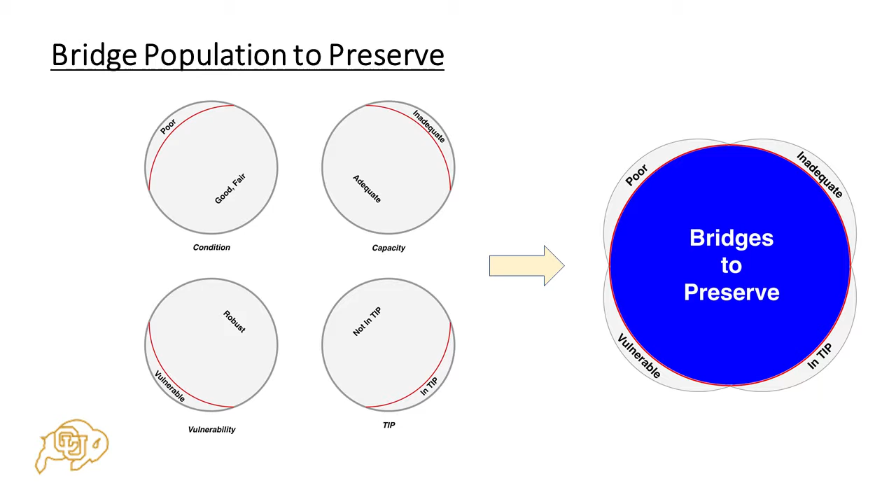So here's that same slide, but kind of put in words. So we look at the condition of the national bridge elements, and if they're in good condition, we're looking at preventive maintenance actions. If they're in fair condition, we're looking at corrective maintenance actions. If they're in poor condition, we're looking at more than preservation. So we need some repair, rehab, replacement maybe, right?

We look at the condition of the bridge management elements. So these are the coatings and wearing surfaces and so forth. Those BMEs could indeed go into poor condition, and it's still a preservation issue. Replacing a wearing surface is a preservation issue. Then capacity, if it's adequate, this is a bridge we'd like to preserve. If it's not adequate, we need a different solution. Vulnerability, if the bridge is not vulnerable, if it's robust, it's one we want to preserve. If it's vulnerable, we don't.

This could all be expressed as remaining life. Do we see this bridge still being a good bridge to have in service on its particular route and in its particular location? Is that true for 20 years or more? Is that our best estimate? It's a preservable bridge. If we're looking at any aspect of this bridge and we'd like to be rid of it, or the owner would like to be rid of it within 20 years, then it's probably not part of the preservation population.

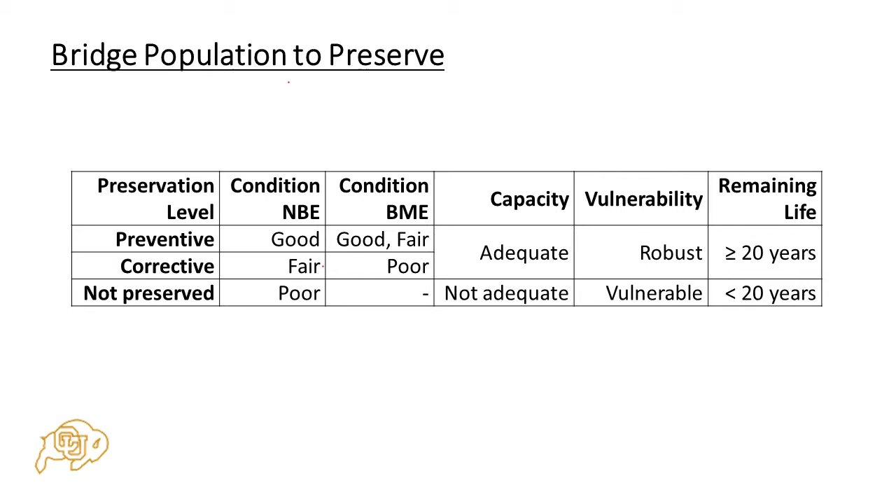We identify preservation actions. This will be a large part of the guide that we're preparing. We've got preventive actions. These include things like cleaning and washing and removing debris from channels, but also sealing surfaces, sealing cracks, zone painting, replacing joint seals, though not the entire joint, removing large debris from channels. We see these preventive maintenance actions, preservation actions, as being in two categories: scheduled, and it means just that. There's an annual or biannual program for performing these actions, and it's the job of the agency to keep up and see that that program is delivered.

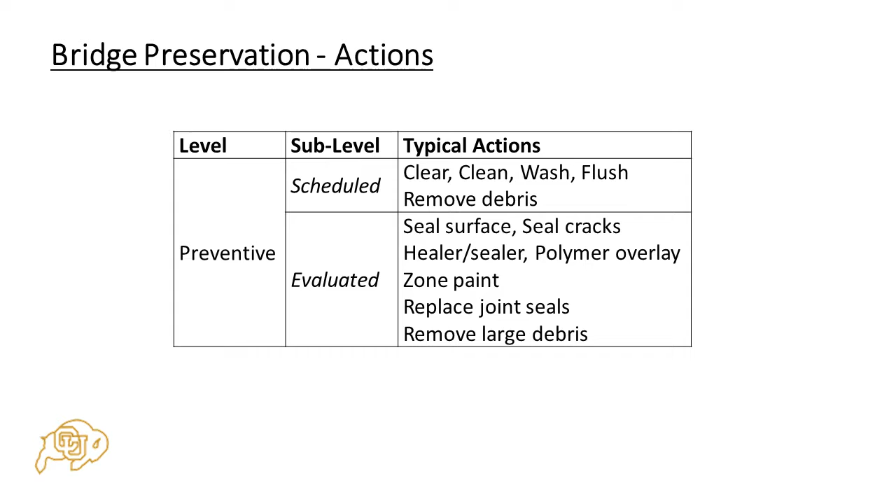Then there are evaluated actions, things that do indeed happen on a cycle, and probably a predictable cycle, but it is a matter of examining the bridge, examining the elements and their current condition, and determining if this year or the year after is the time to do some zone painting or to replace some joint seals. So certainly cyclic on a population level, cyclic on a planning level, but bridge by bridge, the owner wants to go and look and determine what to do and what years to do it in.

Then we've got corrective actions. These are repairs, some big, some smaller. A lot of repairs are in kind. We're keeping a bridge pretty much in its original condition. So replacing joints, maybe of the same type, maybe of a different type, but certainly the same movement range if the structure is not otherwise being changed. If things need to be straightened after vehicle impacts, things need to be patched, certainly complete painting. These are all keeping the structure or bringing the structure back to its as-built or as-new condition.

Going together with corrective action are betterments and retrofits. So here we are making changes to the structure, but we're not improving load capacity, we're not improving traffic capacity, not adding lanes or changing clearances. But still we're modifying fatigue details, maybe changing out a drain system entirely so that it has more straight runs and so it doesn't clog as easily. Maybe modifying bank protection to move to better protection for banks, better systems for that.

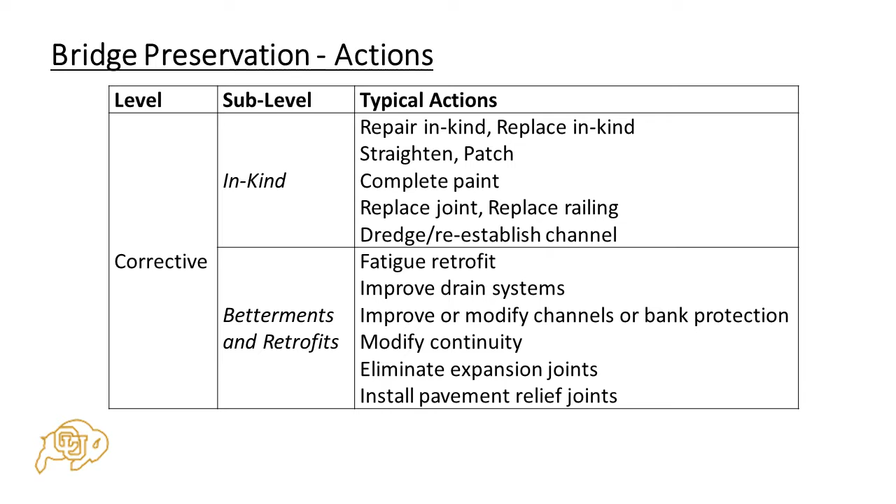Possibly modifying continuity: eliminating an expansion joint over a pier, and you're making the deck continuous and so on. So those are all considered part of preservation, though the bridge is not as designed any longer. It's being modified, but not in a way that changes capacity. So all in the preservation category.

So we're putting together tables like this. We've got quite a bunch of them in the guide. This one is an action set for decks. So these are our preservation actions. And the categories abbreviated here are shown. We've got preventive and corrective as the major divisions for the rows. And then within preventive, we've got scheduled preventive actions, evaluated preventive actions, and in corrective actions, we've got the in-kind work, and then the betterments and retrofits. Here for decks, there are certain things that we would do to all decks, certainly sweep and power wash.

If the deck has a wearing surface, we'd maintain that wearing surface, seal cracks and so forth. And any deck, if it has a drainage issue, if things are clogging up or water's pooling on the deck, then of course that should be improved. So those things don't so much respond to what material the deck is made out of, they're just things we'd want to do on decks.

But then separately, there are actions to take for a reinforced concrete deck, a slightly different set of actions to take for a steel deck, and yet a different set of actions to take for a timber deck. So there we get a bit more specific and identify actions that are preventive or corrective, that are scheduled or evaluated, and so on. So we get this organization of things to do to the deck.

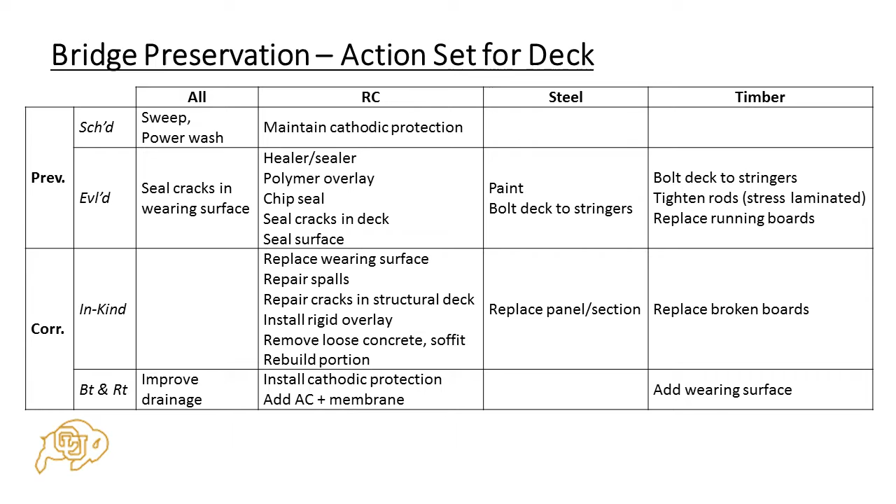There's also kind of an age and a condition orientation to this. The decks in good condition, which are typically the younger decks, they're going to wind up qualifying or being candidates for preventive maintenance. As the decks get older and accumulate some defects and accumulate some wear, they move into the corrective maintenance category. We produce a lot of these action sets.

So we'll have some for approach, for railing, for deck, for joints, for drains, for superstructure, for bearing, treatment of the channel, mainly the channel bank is what we're interested in, substructure. And then overall bridge actions. Washing a bridge is all the components. So action sets for each of these, and culverts too. So an action set for preserving culverts.

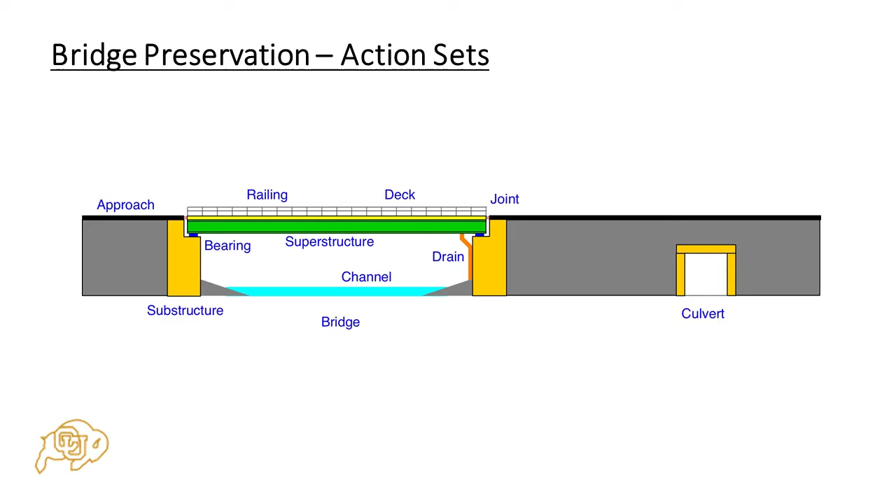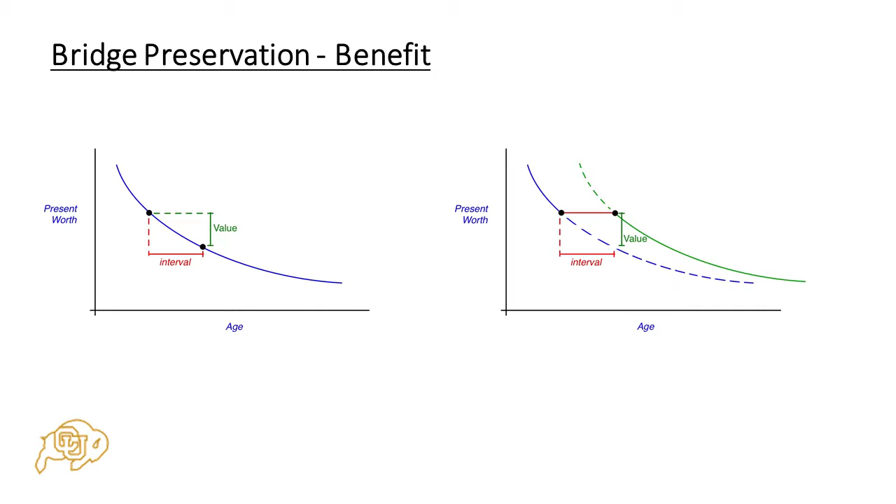Slow is more like it, but if it halted the wear for that interval, then you've captured that value, and so we should be willing as owners to spend at least that amount to do the preservation work. So there's how we're trying to get a handle on where the money's coming from, where the value is coming from. This kind of approach gives us the result that it's a pretty good idea to invest money because there's value available.

In younger structures, the value is lost more rapidly for a given time period. But for older structures and structures in poor condition, there's less value available to preserve, to capture, to turn into a basis for preserving. We make the actual numerical analysis with annualized costs. So we have C_T as a threshold. So we look at the replacement cost over the untended life, not unintended, but untended.

What if you did nothing to this bridge, put it in service, and just let it run down, and eventually you have to replace it? Nobody treats a bridge like that, maybe local governments some of the time, but nobody wants to leave it completely without maintenance. So this is a notional cost.

Then C_0 is the replacement cost for remaining life. This varies during life. As we're approaching the end of life of a bridge, we've got a replacement cost which isn't changing much. You know, it's whatever our current cost for building a new bridge is, but the remaining life is disappearing.

So this C0 keeps increasing during the life of the bridge and goes up dramatically towards the end of life. And then CP, P is preservation. So what's the annualized cost for preserving the bridge? It's the replacement cost plus the action cost over the extended life. So what we're always looking forward to is, here's a bridge, we're going to have to replace it. How many years are left in its life? So the annualized cost to end of life is replacement over that remaining life.

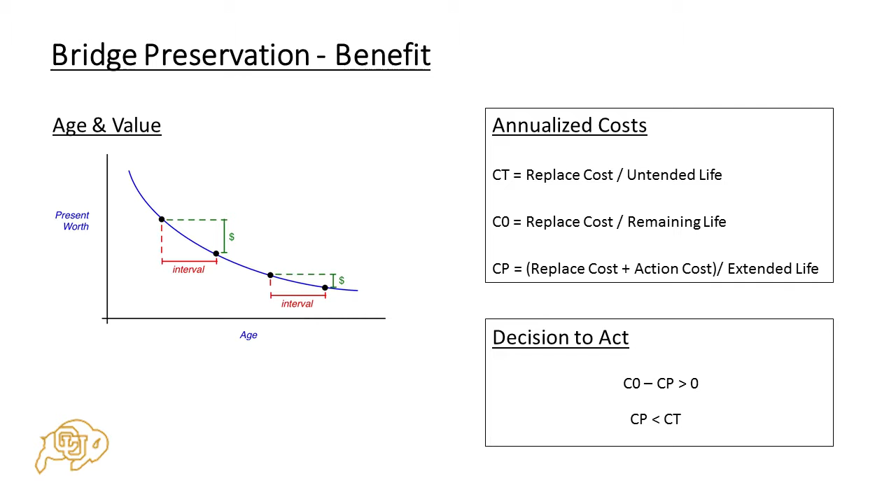As we're doing these analyses, we find that almost any action, if it extends life at all, if there's an identifiable extension to life, it's worth doing. However, if the bridge is already near end of life, it's very expensive, even though it's worth doing. So we have to introduce this idea of a threshold to get to a point where bridges just shouldn't be preserved because they're getting so close to replacement.

So we can do a quick example. This is part of our phase 1 report to the project panel. These cost numbers are from Colorado. We've been doing a lot of work for them, developing cost numbers and deterioration models for their bridge management system. So we've got a AASHTO bulb girder bridge here, typical of a lot of bridges in Colorado. The cost to replace the girders on this bridge comes out to be $420,000. That's only the girders. That's not the deck that would have to come off if you replace them. So this is a fairly narrow example.

We look at the cost of replacing the joint seal on this bridge, and that's $7,200 given the length of joint on the bridge here, and those seals have got to be replaced every 5 years. The 5-year number is coming from some deterioration model work we did for Colorado for their BMS. So we asked the question, we're worried about deterioration of the ends of the beams, the ends of the pre-stressed girders. And if they are deteriorated, we're probably replacing the girder. Not a lot of repair options. So if that begins to corrode and we're spalling off the concrete cover, we got a big problem.

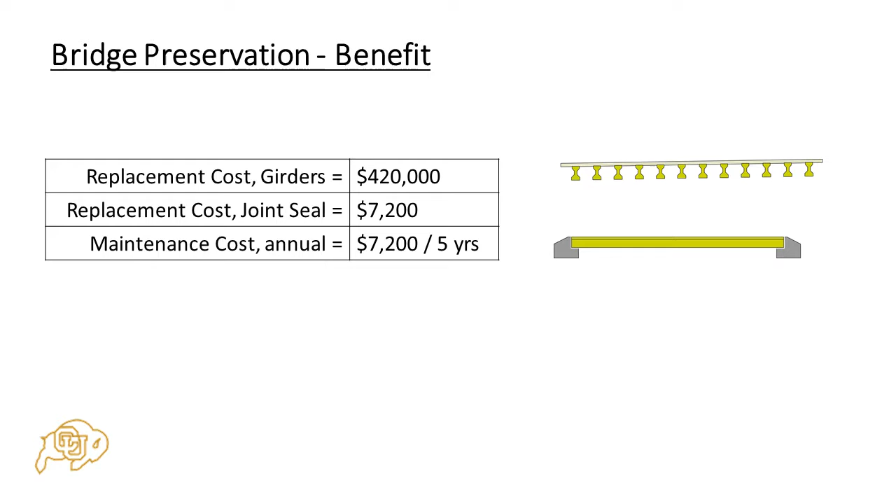So the joint seal has got to be maintained. And so there has to be this $7,200 spent every 5 years to keep the joints in place and keep them watertight. So we start doing these annualized costs. So that very top line, joints not maintained, it's estimated that we're going to have severe problems, deterioration at the end of those bulb girders after about 40 years if the joints are never maintained. So we look at the capital cost of the girders over 40 years, and the annualized cost is at $10,500.

If the joints are maintained, this bridge may last at least 75 years. It would appear that the life of pre-stressed girders is a lot longer than that if you keep the water off them. But we'll say 75 years. We are indeed taking the AASHTO design life there. The annualized cost of the girder drops to nearly half, $5,600, but there's an annual maintenance cost. That's the $7,000 odd joint seal replacement every 5 years. So that gets annualized too, so around $1,400 a year. So there is a net benefit of about $3,400, $3,500 a year to maintaining those joints. So the owner ought to maintain the joints.

We looked at this bridge being unmaintained. The joint seals are allowed to deteriorate for 20 years, and then we pick up a preservation program at 20 years, and the preservation is aimed at making those joints watertight now and keeping them watertight afterwards. Well, part of the service life has already been lost. But we believe that we can get the girders to their 75-year design life if we pick up the protection of those joints, the watertight treatment of those joints, at least at 20 years. But all the costs are higher now.

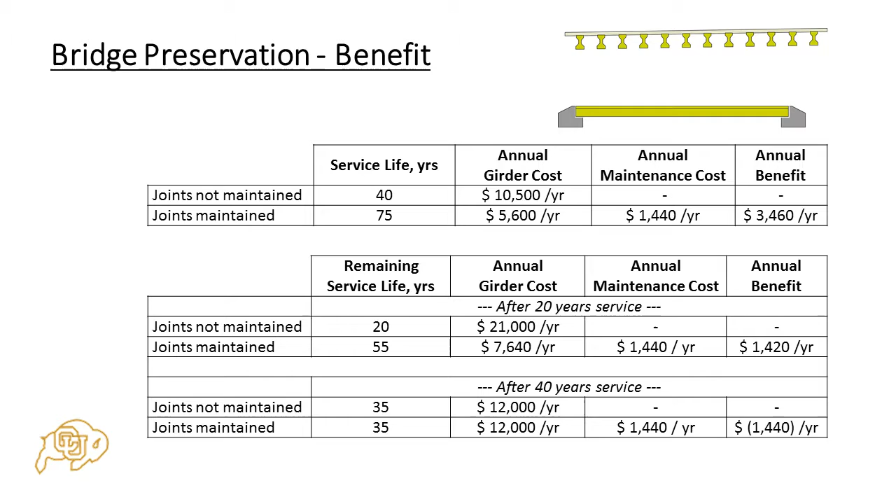So this kind of analysis, anticipating replacement of bridges, anticipating replacement of components, and looking at how certain preservation actions could incur an additional cost but delay the replacement, this gives us a basis for making an analysis.

So here's some of the chapters and sections of the guide that we'll be putting together. We'll start with describing the elements of a bridge preservation program, giving definitions of standard terms, talking about how an agency should organize itself to support bridge preservation. You should have a bridge preservation engineer is kind of the nub. Then what are the bridge preservation actions? What we're calling preservation levels gets us into preventive versus corrective, scheduled versus evaluated.

Bridge preservation programming, how should decisions be made to select preservation actions, to execute them, to see that they are executed in a timely way, how to identify repair needs and retrofit needs.

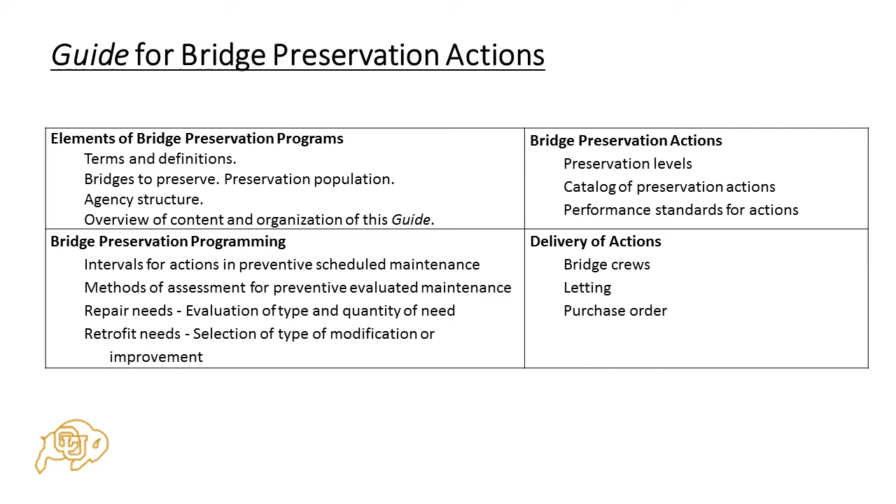We'll be discussing delivery of actions, not so much with recommendations, but just saying what's out there, using state crews, going to letting of projects to do multiple items at a bridge, and going to purchase order contracts, job order contracts, as needed contracts. States give various names to this thing, but it's the kind of a system where you set up a set of bid items and an indefinite quantity but agreed prices, and then you call on the contractor as needed to deliver that work.

We'll look at evaluation of preservation action and programs, so keeping track of how well the preservation actions are doing and then how well the program is doing overall. Is the program achieving some net benefit? What can you do with maintenance quality assurance surveys to track that certain things like cleaning bridges are being effective?

You may be sweeping a bridge every 2 years, but the MQA crew is out there anyway, looking at the roadway, certainly, maybe or maybe not looking at your bridges, and so we'd want them to do that. Is the grit coming back to the curb lines in 6 months, and so your interval's all wrong? How can we use and take advantage of other information that sister branches of the agency are doing?

How do we evaluate repair actions after they're in place? Are they holding up? What kind of cycle do we have for looking at inspection reports to glean information about the performance of the preservation actions?

Costs and benefits, how should costs be captured so that we're getting good information on unit costs? We want to express these things in production units, element units basically, so that they're the most natural thing to use for preservation engineers in examining their programs.

And then, of course, performing the cost-benefit analysis, we see that mainly as a prognosis, should we take this action. But once the action is taken, periodically that cost-benefit analysis should be re-examined and re-evaluated. Did you get it right the first time? Looking at your recent past history of preservation and how the costs and benefits came out will make that process better and better and more reliable going forward in the agency.

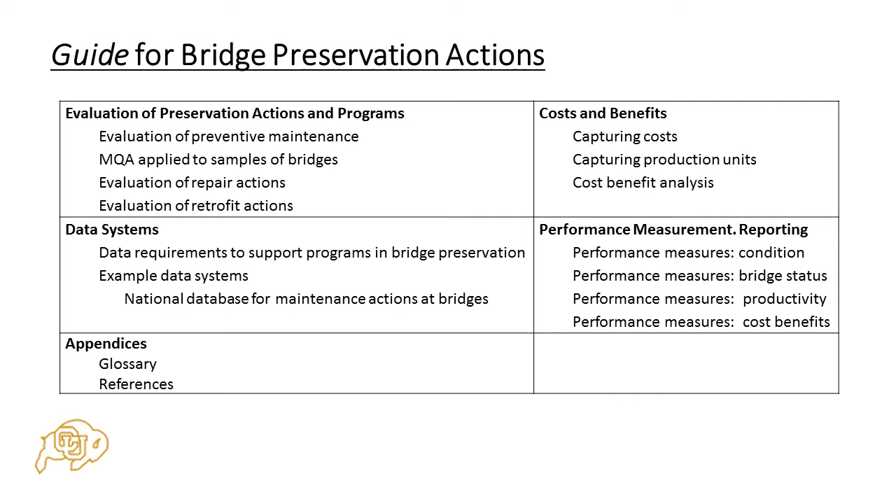And then appendices are glossaries and definitions and references of the source documents. The source documents are coming from the states. A large part of our early work was collecting information on what the state practices are. The guide is going to be absorbing these state practices, organizing them, looking for similarities. We're not trying to invent new things. We're trying to see what kind of model activities and model organizations exist already that are best

practices. Here's an example of some of the things that Georgia DOT does. This is from the Bridge Structures Maintenance Plan. And they've got certain actions that they perform at a regular schedule, a scheduled activity. So that's pressure washing. They do it at 10 years or at 15 years, depends on where the bridge is. The fall line's a geographic feature in Georgia. It pretty much divides the state in half, and the climate's a bit different, so they've got different intervals.

Georgia also has a program for evaluating needs for actions. They've got this up at the policy level. So they make a formal decision whether or not to replace expansion joints at regular intervals, and that depends on what the truck traffic is. So we've got scheduled actions, we've got evaluated actions, and in fact our use of those terms came from our imitation of what Georgia's doing.

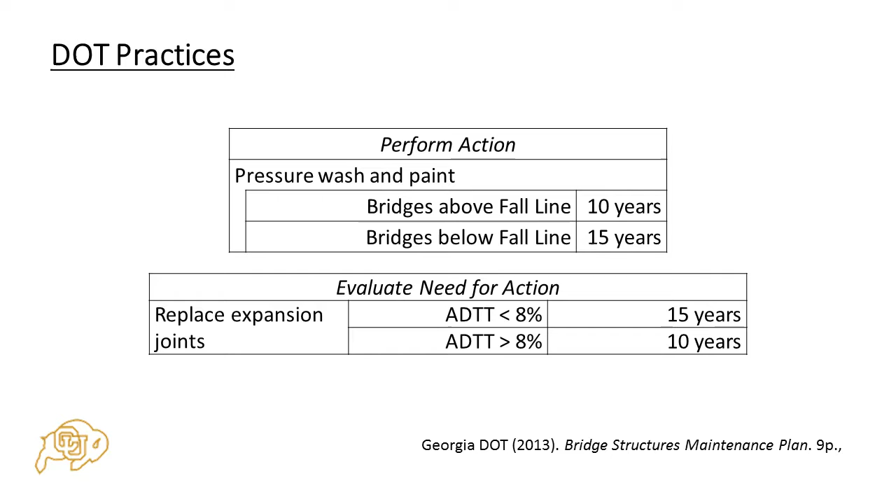Pennsylvania DOT has their Publication 55, the Bridge Maintenance Manual, and this has been around for a while. They substantially updated it recently. They've got performance standards. What is a preservation action? What kind of crew do you need? What are the reference specifications and material standards that the DOT uses? What are scheduling considerations? What's the daily productivity?

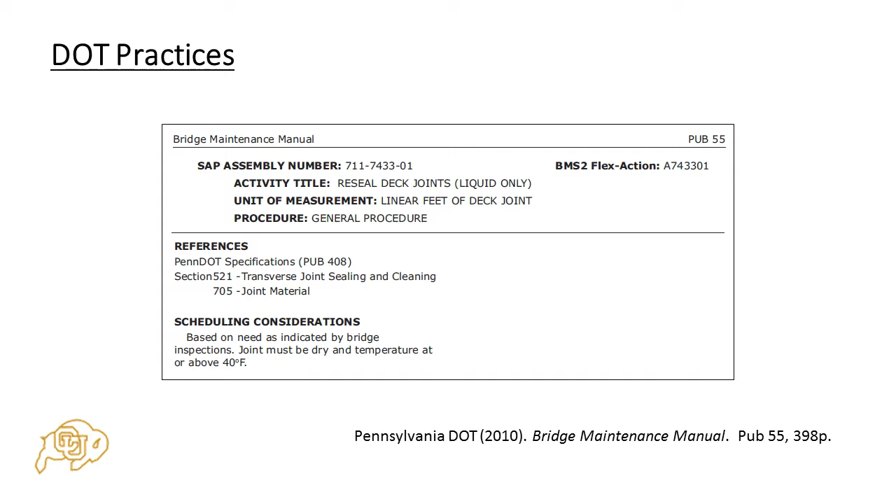There's a whole lot more than the little graphic I took out here, but it is kind of a cookbook. There are step-by-step procedures, but links to specifications you need, links to permits if that's going to be an issue for a given activity. So very good, very specific information on what the action is, how to perform it, how to record it, what's the basis for measurement. You'll also see up in the upper right the BMS2 Flex action. That's a serial number that ties it into their bridge management system, so they can get this activity recorded for a particular bridge, particular day, particular quantities, and particular costs. So a very good data organization in addition to being just a good way to present the method.

Then we got Wisconsin. Bill was showing this yesterday, in fact, showing pretty much the same table. I've pushed around the headings a little bit to make it fit my slide. So this is Wisconsin DOT Bridge Preservation Policy Guide, and here we see deck joints, and what can the owner do for these? They can clean them, they can seal them or replace the seal, they can replace the joint, they can eliminate the joint. And those decisions are tied into the condition state for the joint, they're tied into the defects that may be present or not present, and then the condition states for the defects as well, and the anticipated extension to service life. So a very nice programmatic way of helping engineers select the appropriate actions.

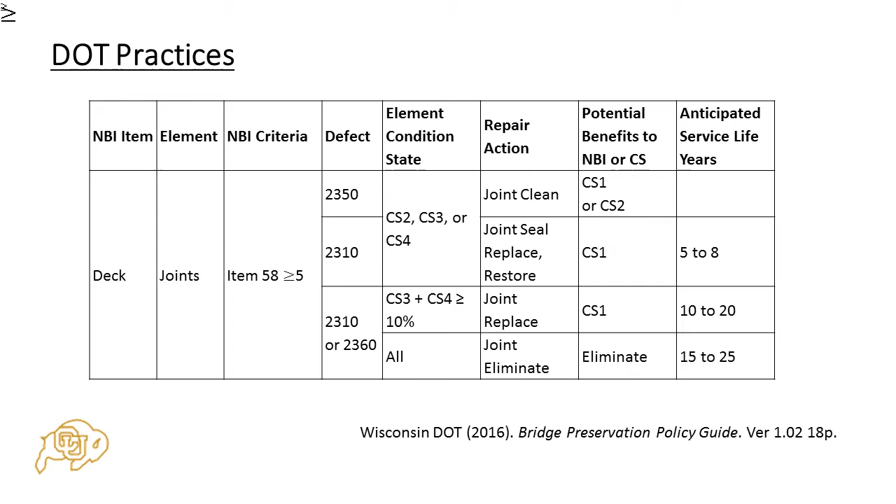So we've been looking at all of the 50 states and collecting similar documentation. There are a lot of similarities about how people are approaching these things, and so the guide will try to put these all together and organize them and offer the summary of the best practices that we are finding among the DOTs. The thing we're working on right now this fall is collecting unit costs from states for preservation actions, so that as we do a set of examples for cost-benefit analysis, we can defend the numbers. We say these numbers are coming from real owners.

We're collecting a lot of maintenance histories so that we can look at bridges and see what was the age when a deck was replaced, what was the age when a joint was replaced, what was the age when painting was required. If an owner is putting overlays on, do they do it once in bridge life or 2 times or 3 times, and how far apart are those overlays occurring? And how did the overlay change? Initially it's a thin polymer overlay, later on it's a cementitious overlay, and so on.

So we're looking at the maintenance histories to understand the intervals and to document and defend an idea of what interval is gained, what's that extension to life, which is essential to the cost-benefit analysis. We've got a bunch of states supporting us in this. We've got 11 right now: California, Connecticut, Georgia, Michigan, New York State, Ohio, Oregon, Pennsylvania, Utah, Virginia, and Wisconsin are all helping us with some or all of the information that we're trying to collect to defend and support and substantiate the ideas we're putting forward in the guide.

So our schedule, we started last year. Our phase 1 was completed in March 2016, and the project panel had to review a report and so forth. We'll have our catalog of actions and a lot of our data collection done this spring. We'll have a draft guide out to the project panel middle of next year. April is the schedule. That may slip a little bit. These things always slip. And then our final product to NCHRP will be in the spring of 2018, and it's at that point, provided that the project panel believes it's a good product, that it would be offered to AASHTO to consider.